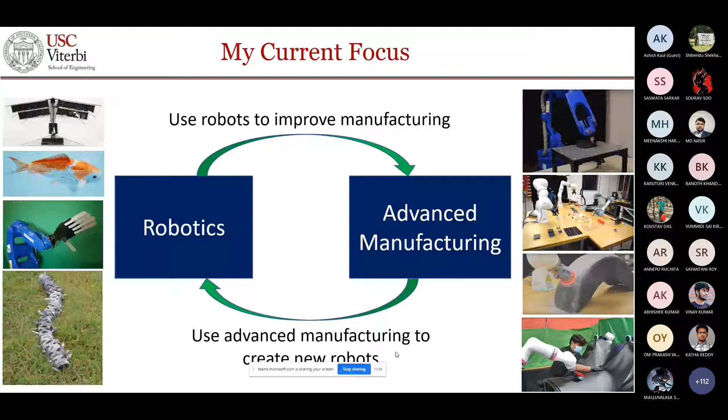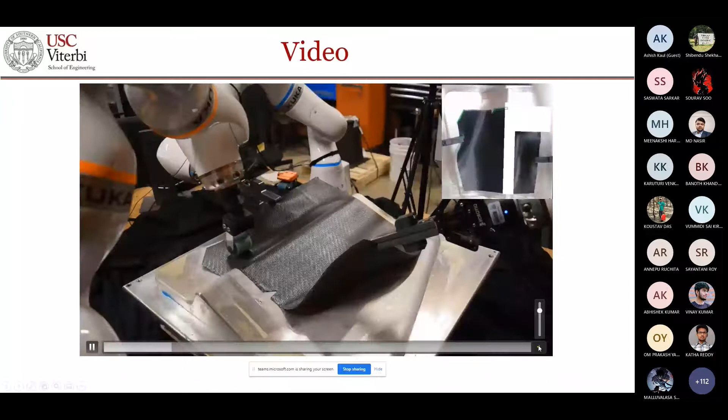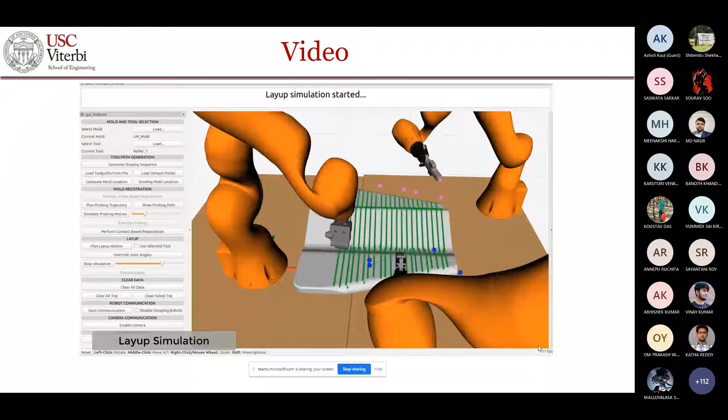I'll quickly show you some work on our composite processing. This work shows how we can use robots to process composites. The system uses advanced computer vision to detect defects and calls humans for assistance. Humans play an important role in robotic cell operations, providing the cell with high-level strategy to generate good quality plans. Our robotic cell can produce defect-free composite parts. We believe this work will accelerate the adoption of composite materials and lead to the realization of innovative robotics.

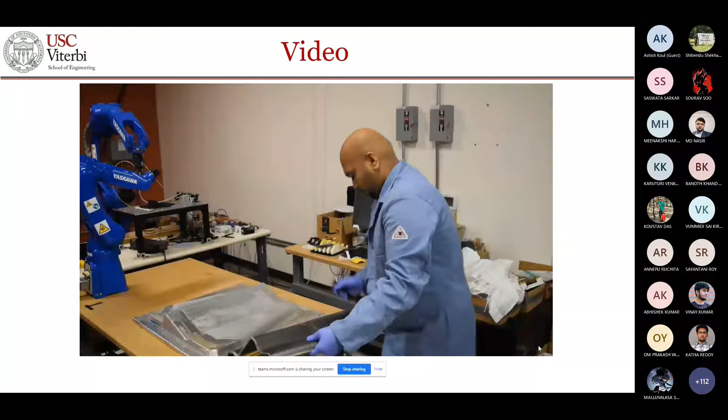I would also like to quickly show a video on our flapping wing micro air vehicle. Can someone confirm that you were able to see the previous video? Yes, sir. Okay, great.

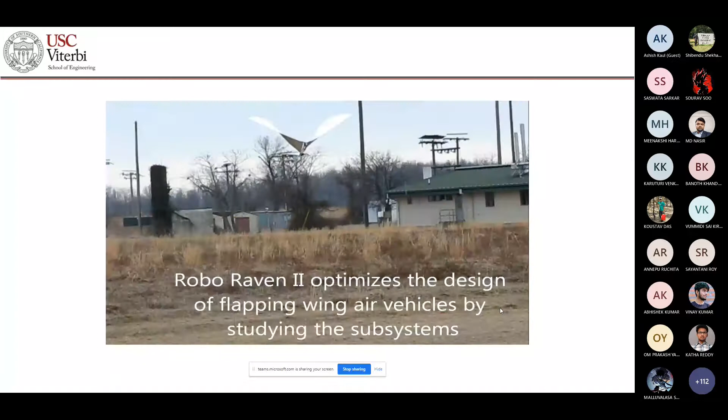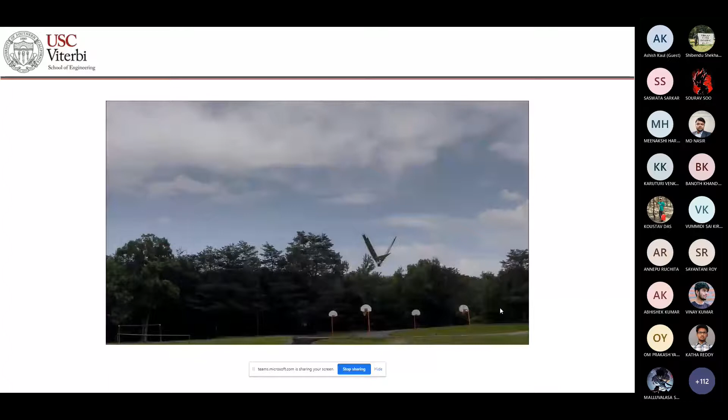We have been building this flapping wing air vehicle for a while. The idea is to create a flying platform that flies by flapping its wings. We have built many generations of this platform. In the third generation, we started integrating flexible solar cells into the wings, which we use to charge the battery, allowing the platform to fly using harvested solar energy. In the fourth generation platform, we added an autopilot, which allows it to loiter about a specified waypoint, or you can command it to go to a waypoint.

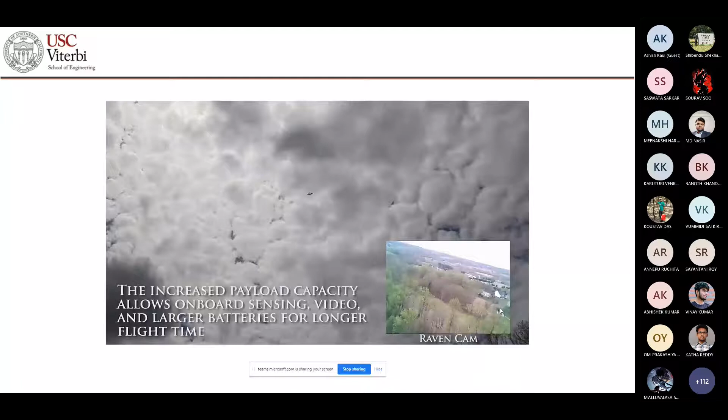In the fifth generation platform, we added thrust boosters at the back, using two small propellers to boost the thrust, allowing the vehicle to perform very aggressive aerobatics. Using this, it can dive and also climb very steeply. This platform flies with a camera, so you can see whatever the platform is seeing. That gives you an overview of different things happening in my research group.

Now coming back to the topic for today, we are interested in exploring additive manufacturing with robots. Before coming to that topic, let's review what we would like manufacturing to be able to do. We want manufacturing to offer features to deliver high performance, often meaning we need geometric complexity and material heterogeneity, so the manufacturing process should be able to provide it.

We want low cost so that products are affordable. We want low lead time, so when the order comes in, by the time the product goes out, the time should be as short as possible. We want to be able to get a high degree of personalization, so we can make custom things. And we want the environmental impact of the manufacturing process to be low. This is our wish list in terms of manufacturing.

Now, if we take a look at some common manufacturing processes, processes such as injection molding and die casting deliver low cost through custom tooling. For any part geometry you want to build, you will build a dedicated mold or a dedicated die for making the part, and this allows fast cycle time and low cost. But complexity is moderate, lead time is high because it takes time to build that mold or die, and this is a mass production process, so you cannot customize - you cannot make three different things and yet use the same tool.

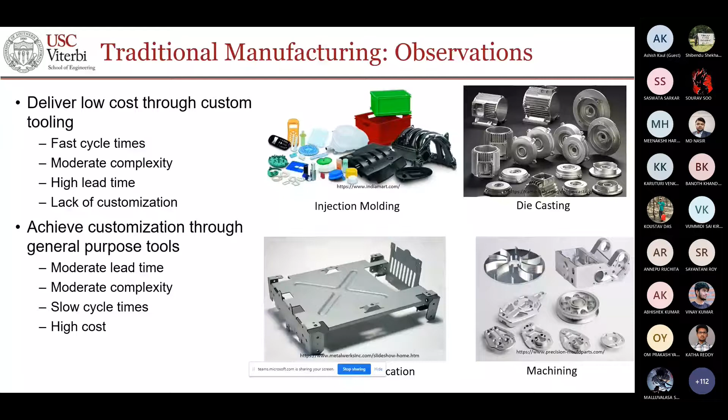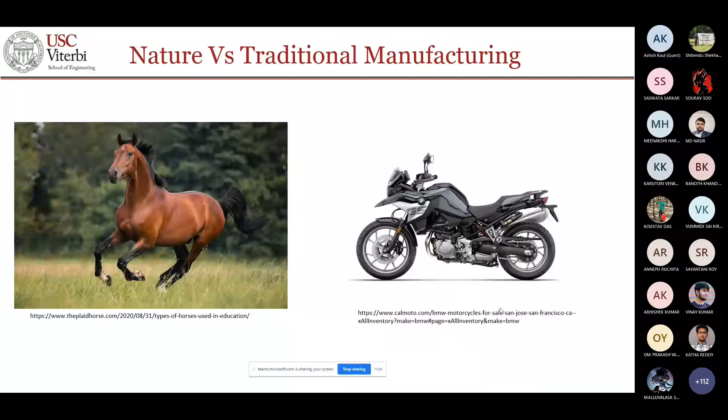So additive manufacturing is a process which we want to grow things in place. Now, in traditional additive manufacturing, there's no part-specific tooling. You can build incredibly complex geometry. The idea is that you're going to take the desired model, slice it into very thin slices, and build one slice at a time, adding one slice at a time, and that's how you build the entire part.

So if you think about additive manufacturing, it's basically stacking up 2.5-dimensional layers to build the part. It is using two-dimensional or 2.5-dimensional layers to build the part, so it's not really creating 3D layers. In nature, when things grow, we do create fully three-dimensional shapes there.

But additive manufacturing has many benefits. You can realize shapes that are not possible using traditional manufacturing. You can get enormous shape complexity because you're not going to pay a penalty for building the tool, or sequentially process feature by feature. So therefore, you can have really complex shapes. You can do customization without incurring any cost penalty, and you can eliminate post-fabrication assembly operations.

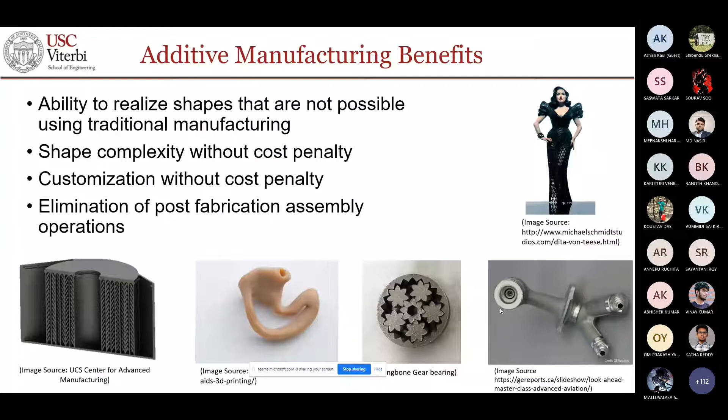But then there are challenges. Let's quickly review them. Since you're trying to build things layer by layer, and these layers are thin, it takes a long time to build a part. And often if you have an overhang structure, then you would print a lot of support structure which needs to be removed, and that's going to take a long time. So most additive manufacturing processes have long build times, particularly when you're trying to build large parts.

You are approximating the shape via 2D layers, and there is significant potential of delamination between layers. So for many different shapes, if you approximate the geometry by 2D layers, you get very poor mechanical properties. You apply a little bit of force and layers will just delaminate, and that creates a major problem.

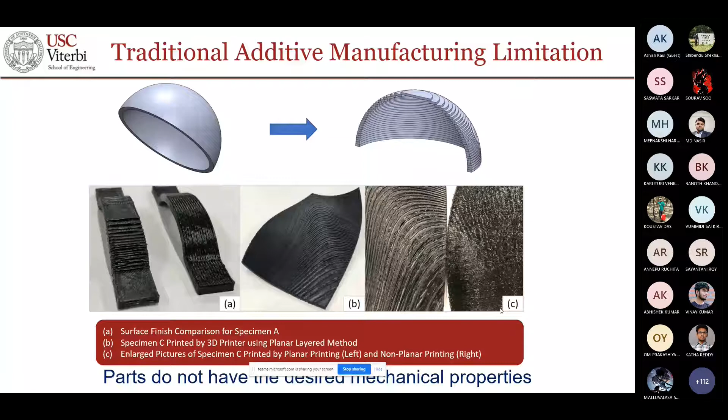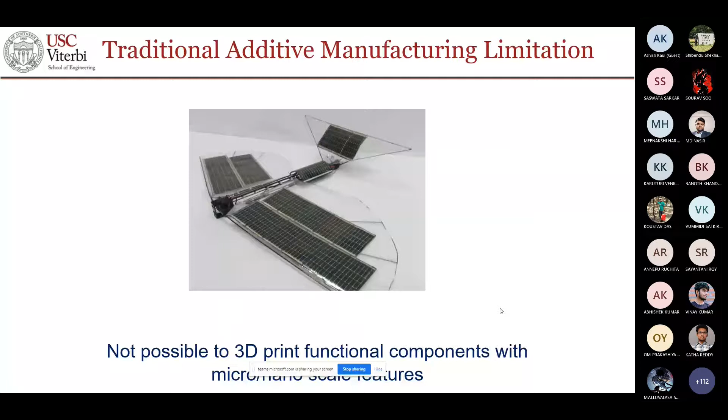The other limitation is that usually the machine will be about 10 times the size of the part that you're trying to print, particularly if you're dealing with metal machines. Now plastic machines are not that big, but in metals, machines tend to be very big, roughly 10 times the linear dimension of what you can print, because with metal you have a really complex system for managing the material and also delivering energy into the material.

Some people say that some of the earliest examples of additive manufacturing are pyramids, which were built layer by layer by humans. So you see, people were able to build things which are 100 times their size scale.

Current additive manufacturing requires huge machines to build large parts, and we would like to change that. So these are some of the limitations of additive manufacturing. Now the question is,

how can we overcome these? Our vision has been that we want to be able to use robots, particularly multiple collaborating robots which can then build large parts. And we want to really use three-dimensional layers, so we want to make 3D printing truly 3D in nature.

We want to do 3D printing with 3D layers, not with planar layers. We want to build really large parts, and we want to explore new sensing technology for in-situ monitoring and control, so that if there's any defect forming in the additive manufactured part, we can fix it on the spot. The cell can do material deposition, place prefabricated components, and also do post-processing. That's our vision, and that's why we believe using robots is truly exciting in this field.

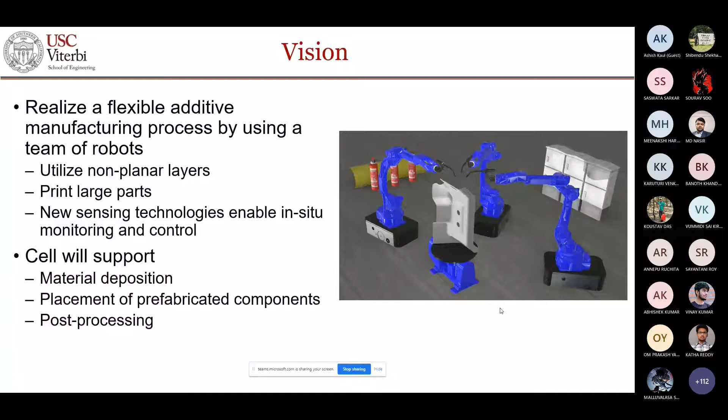Our research has three different layers. The first, bottommost layer is additive manufacturing, where we are interested in developing technology which can do additive manufacturing with non-planar layers.

All our execution happens with robots, so we do a lot of advancements in robotics. And since we are using complex three-dimensional layers, created using multiple different interacting robots, we need advanced artificial intelligence to pull this off.

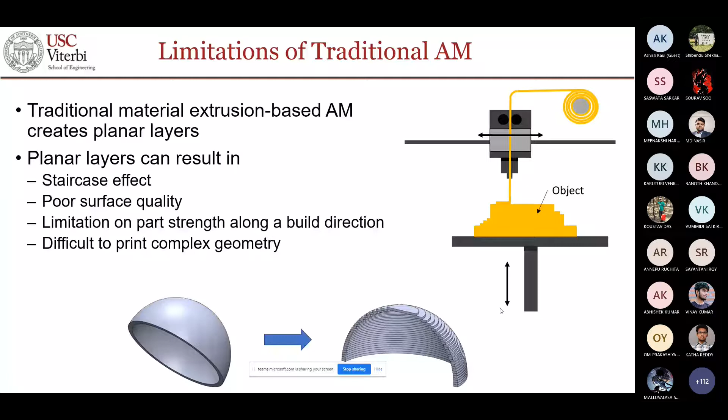Let's begin with the very basic technology: printing with conformal layers. The first idea is that rather than stacking 2D layers as done by traditional additive manufacturing, which creates huge delamination problems, we want to be able to use truly three-dimensional layers. If we can use truly three-dimensional layers, mechanical properties are significantly improved, and we also get better surface finish.

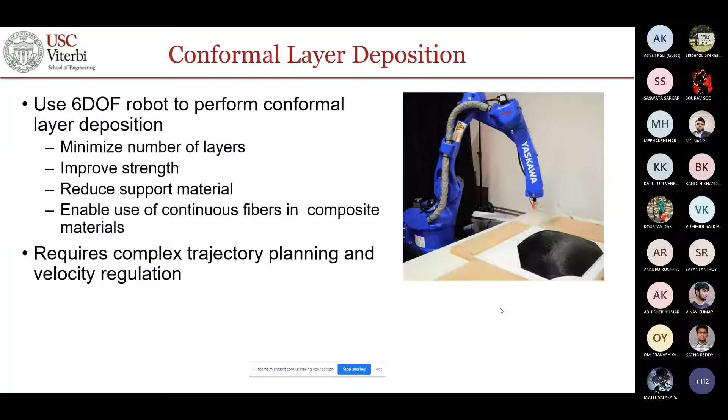We want to do this conformal deposition using a 6 degree of freedom robot, and this requires us to solve complex trajectory planning and velocity regulation problems. We've done this and created an interesting array of geometries where we've demonstrated that printing time with non-planar layers is comparable to printing time with planar layers. However, mechanical properties are significantly better, and in some cases surface finish is better too.

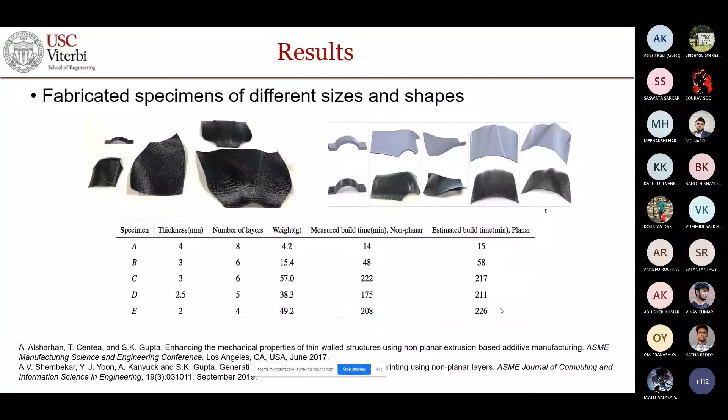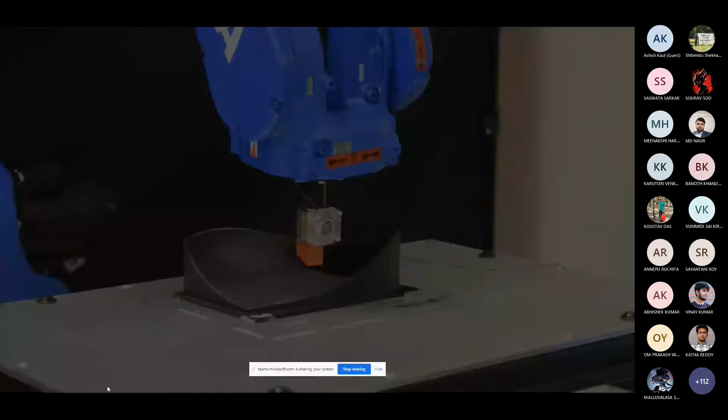This video will quickly illustrate that process, how it works. In this case, we are using a prefabricated substrate and performing printing on it. Later in the talk you will see a multi-extrusion system where we can fabricate the substrate with the same robot, but the first experiment I'm showing you uses a prefabricated substrate. This type of technology is especially useful when printing with composite material, which lets you create really good quality parts.

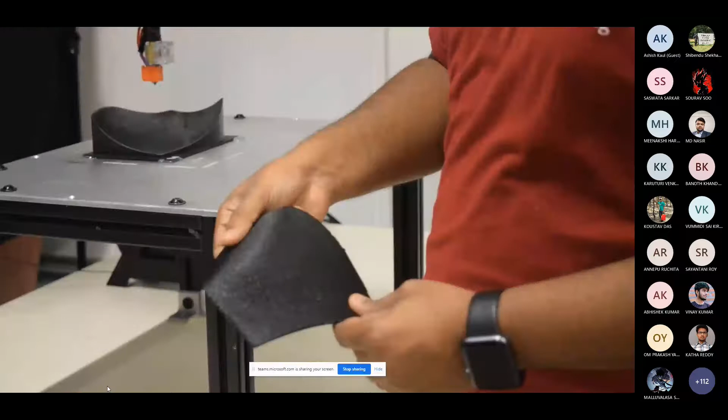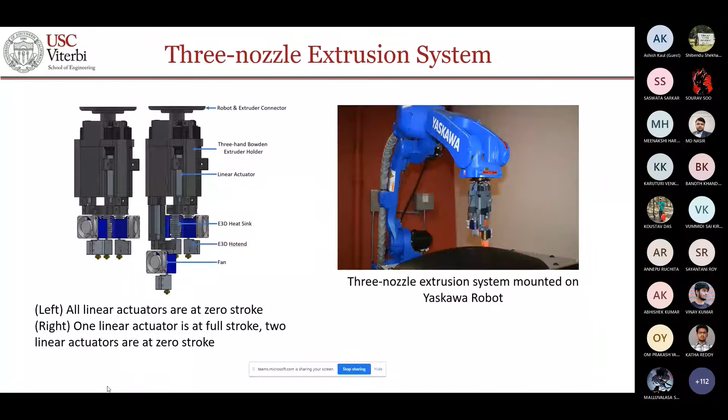Once you're able to do conformal printing, we can build a setup with multiple different extrusion nozzles, and we've built that setup with 3 extrusion nozzles. So we can do 3-color printing, or print support material with one nozzle and print with the others. We can do quite interesting things in this case, with a setup that does printing with 3 different nozzles.

Once you have the capability to do conformal printing with multiple different nozzles, an interesting possibility opens up: multi-resolution printing. Fixed resolution printing means you select one nozzle. If you select a large diameter nozzle, you can print fast but get bad surface finish. If you use a small diameter nozzle, you print slowly but get good surface finish.

But if you have a multiple nozzle setup, then you could potentially print the interior of the part with a large diameter nozzle, print it fast, and print exterior shapes with a fine diameter nozzle. That requires you to use conformal printing, because the outside of the object is likely to have complex contoured shapes.

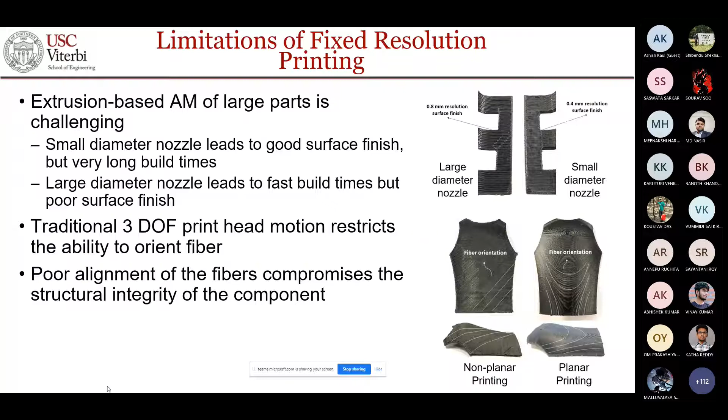So we have done that. Our first setup used 2 robots, 2 collaborating robots, and using that we showed that we can build parts much faster than with the smaller diameter nozzle. The surface finish was as good as the smaller nozzle, part built as fast as the larger diameter nozzle, with surface finish as good as the smaller diameter nozzle. So we were able to find the right balance between the two.

At the bottom of each slide, I have included the papers which provide more detail. This work was published in IEEE International Conference on Robotics and Automation.

After that, we built a single robot setup where one robot with 2 extrusion nozzles is able to accomplish the same result, because we don't want to tie up 2 robots doing this printing. We demonstrated that using a single robot setup, we can achieve similar results. This paper is going to be appearing early next year in ASME Journal of Computing and Information Science.

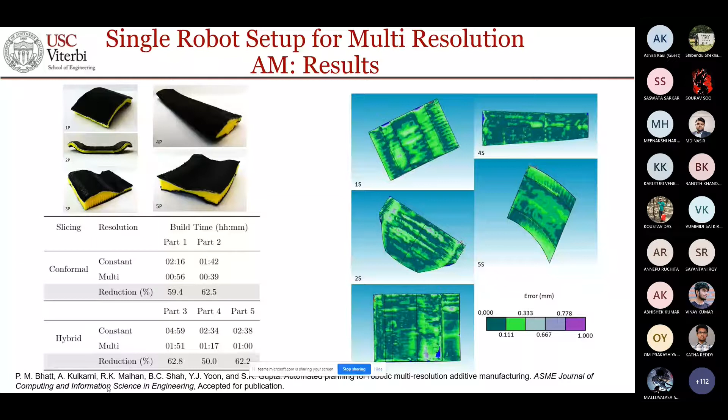As I mentioned before, a lot of additive processes require use of support structure, which slows down the process quite a bit. You have to remove the support structure, which wastes material. It might also lead to poor surface finish, and overall it increases the time. So whenever possible, we want to avoid support structure.

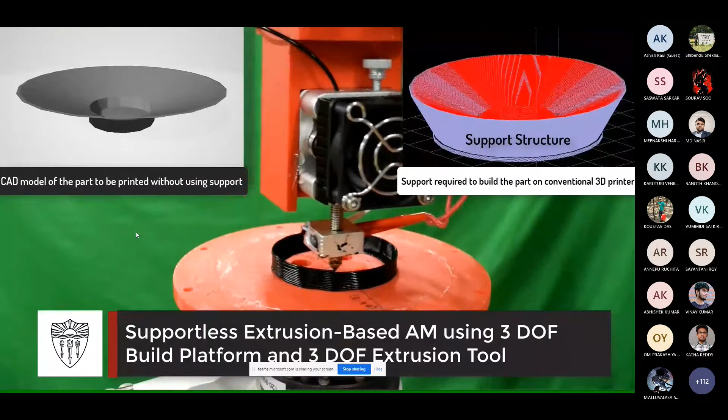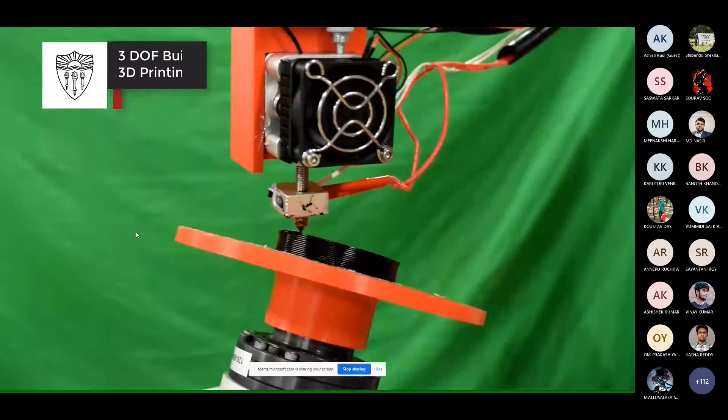So we built a setup where we use 2 collaborating robots. The bottom robot holds the build platform, and the top robot does the deposition. When we start printing parts which lead to overhang, we start tilting the base platform, and therefore we can compensate for gravity, and we don't require use of support structure. So this type of technology gets rid of support structure.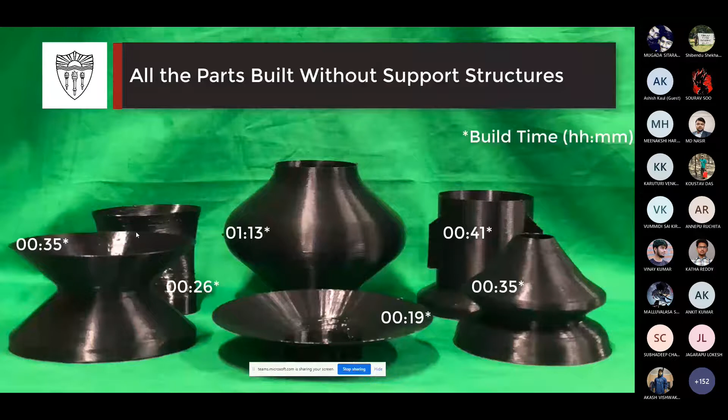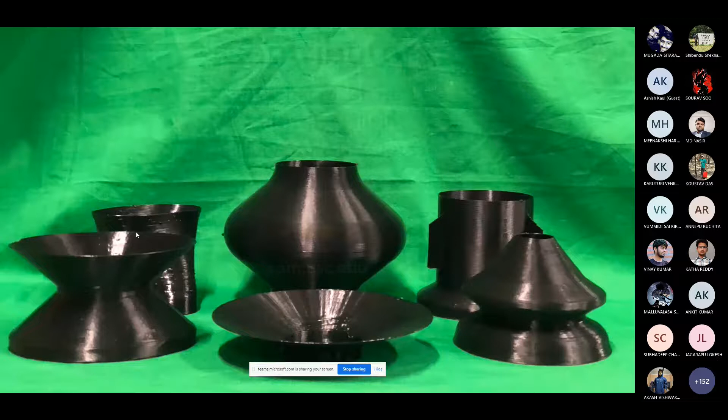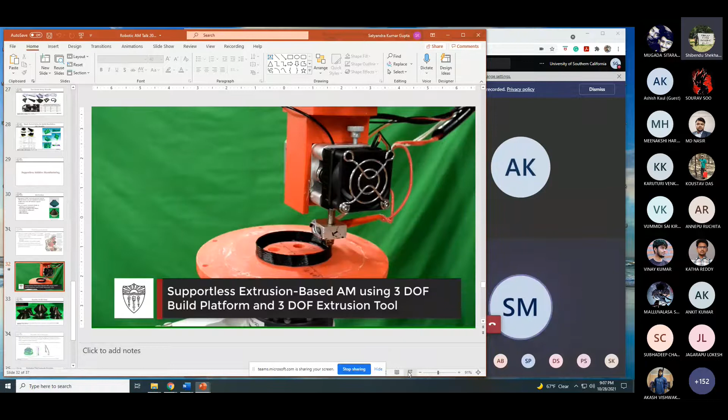Hello, Professor Gupta. Hello. Professor Gupta, you are in muted condition, please unmute yourself. Okay, can you hear me okay now? Now it is okay, sir. Yeah, I don't know, I was not even touching the screen, so I'm not quite sure how I muted myself. So where did you lose me? Hello? So it's okay now, sir. Okay, alright, so I'll just continue.

So we can dramatically reduce printing time, as you can see. For this large part, with support structure, it would have taken 11 hours 42 minutes to print. We can print it in 1 hour and 13 minutes. This work was published in Additive Manufacturing Journal in March 2020.

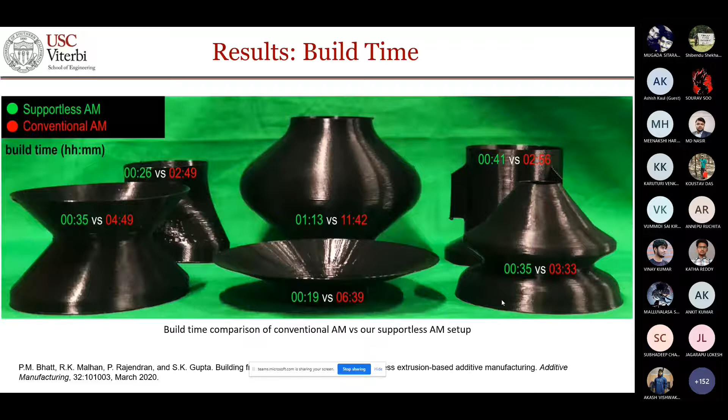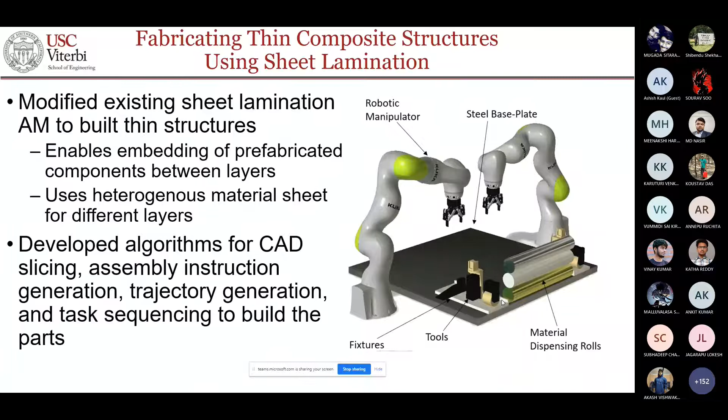Another interesting thing we have done is that rather than doing extrusion-based printing, which is a point-based process, we also built a process where we can stack sheets, cut sheets, shape them and stack them. That allows us to additively manufacture a whole variety of interesting things, including wings of flapping wing air vehicles, as well as a wide variety of other interesting structures. This paper was published in Additive Manufacturing Journal in 2019.

Another interesting thing we have demonstrated is that during printing, using two collaborating robots, you can embed externally fabricated components. In this case, we have demonstrated that you can integrate assembly and additive manufacturing. We are able to generate plans for picking up components and inserting them. Once a component has been placed, we can print around it. That allows us to create a wide variety of interesting products where we can embed externally fabricated components.

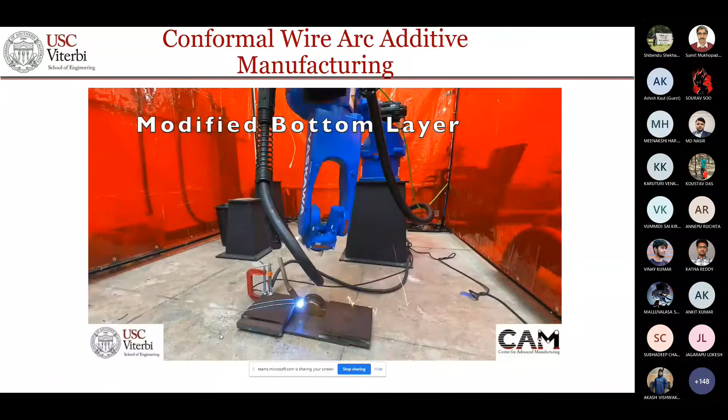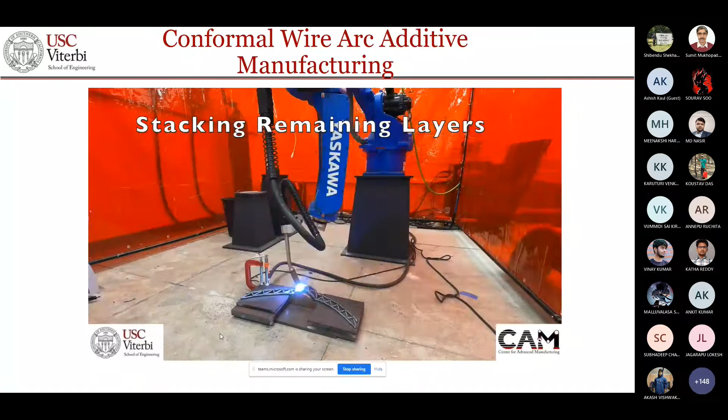So our recent work has been conformal wire arc additive manufacturing. Here we are using robots to do conformal printing using the WAAM process. So we can print interesting shapes using this process.

We have demonstrated that we can actually get reasonably good material properties. So we can do interesting shapes and we can get reasonably good material properties.

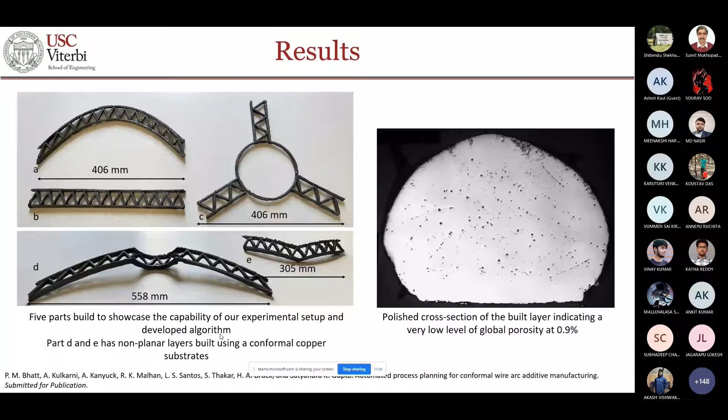So to quickly summarize, robot-based conformal printing can improve mechanical properties by being able to print out of plane. You can tilt the part when you're printing it, and then you can reduce the build time due to support-less deposition, and also you can do multi-resolution printing. Once you can do conformal printing, then you can also do multi-resolution printing.

We can insert prefabricated components during the assembly process, during the 3D printing process, and therefore integrate assembly and additive manufacturing. We enable many more material choices in multi-material printing by mixing the material being printed using either a two-robot system or a multi-nozzle system. We offer lots of interesting choices.

So all these benefits basically illustrate that the idea of doing additive manufacturing with robots is a promising idea, and it holds a lot of promise in terms of eliminating many of the known limitations of the current additive manufacturing process. So then the question comes in: what are the deep research issues? What are some of the fundamental problems that need to be solved?

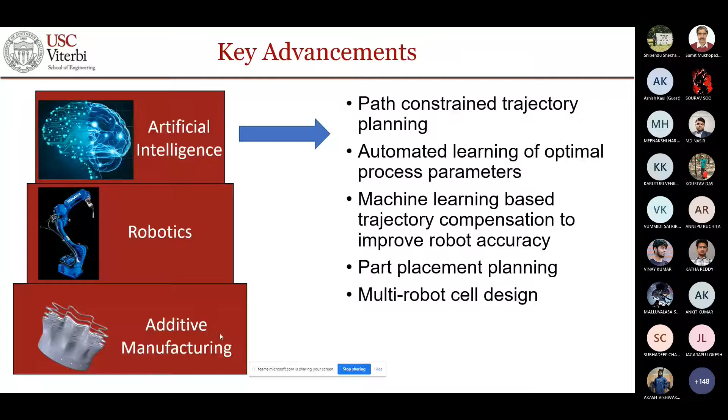The reason why this problem is so hard is that robots are highly coupled systems. Even if you're drawing a line along the x-axis defined in the robot base, all 6 joints have to be moving in a coordinated way in order for you to do that, if you are trying to maintain a certain orientation. So robots are highly coupled systems - there's no just using a single motor to get something done.

Robot performance is also highly non-uniform over the workspace. You can get very good accuracy at certain places, certain other places you will not. The workspace may have singularities - all kinds of challenges because of this non-uniform performance. Robots are also highly nonlinear systems, and this high degree of nonlinearity makes many of these problems quite challenging. As we start integrating external sensing and coordinated motion between multiple different robots, these become really, really complex systems. So all this makes these computational problems very challenging.

The first problem that we want to study is path constraint trajectories. The idea is that you know how your tool tip needs to move in order to create the geometry, and you know how the part should be tilted. So that path constraint is given to you. Now you have to figure out how the robot should move, how robot joints should move, so that the tool moves with respect to the intended object the way you wanted it to move. There are constraints for the path.

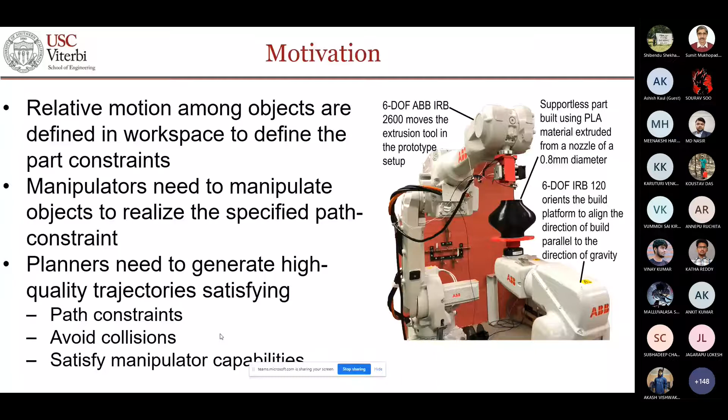You want to avoid collisions between the tool and the already fabricated part. You have manipulator joint limits, you have manipulator singularity - those are all kinds of manipulator constraints that you have to also meet. So you can pose this problem as trying to find a joint space trajectory for the robot where you meet all the constraints, and you can have an optimization function which could be minimization of time, or minimization of some other performance variable like the effort the robot is taking to get this done.

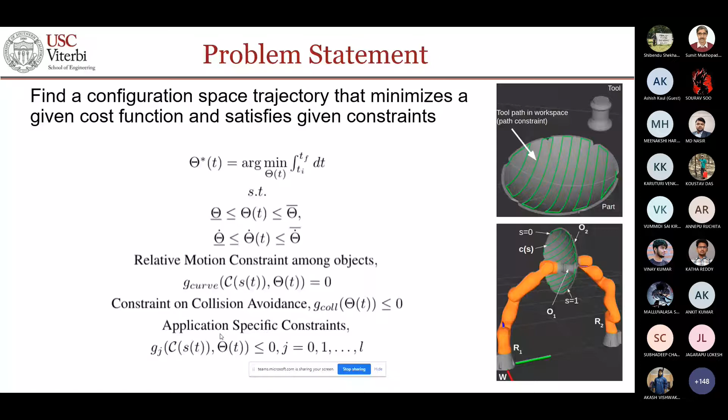Now you can pose this as a nonlinear optimization problem. However, existing nonlinear optimization approaches will not be able to solve it because your constraints are highly conflicting. Once you start using nonlinear optimization, you'll get stuck in local minima, and those local minima basically would not even be a feasible solution.

So our idea in this space has been to use an adaptive representation of configuration variables. We will keep adding more variables or providing finer resolution where a lot of changes have to happen, and we use relatively simple representation where things are not going to change that much. Then we want to use a successive refinement strategy for solving this problem, because giving the problem all the constraints in one go simply will make this problem impossible to solve.

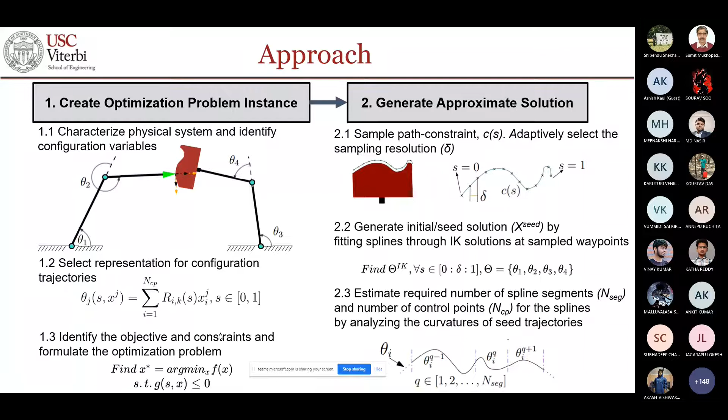So the way we work is that we create an optimization problem instance, we create initially some approximate solution. Using that, we learn where we need more resolution - we're solving this problem with splines, so we're basically asking where you need more control points and where you can get away with fewer control points. And then we want to apply constraints successively.

We don't want to be throwing all constraints at once, because unfortunately the problem is not going to be solved that way. So in this case, we want to start with some basic constraints, then add a few more, then add a few more. That's the successive refinement idea, and we have demonstrated...

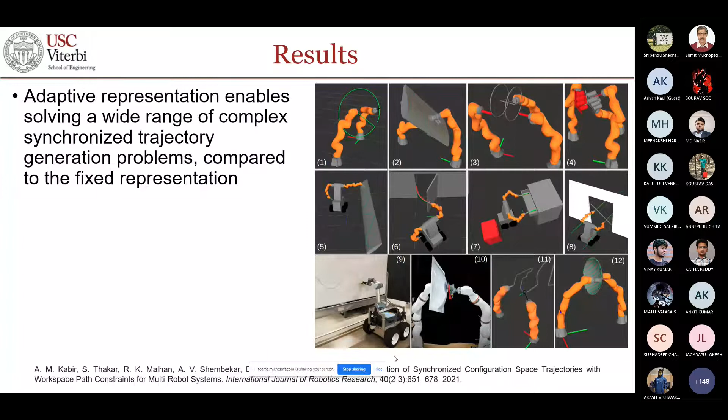So we have demonstrated that we can solve really complex path constrained trajectory planning problems with this idea about adaptive representation and successive refinement. This work was published earlier this year in International Journal of Robotics Research, so you can get more detail from that paper.

The other interesting thing that needs to happen is you need to learn process parameters. For example, when you're doing the WAAM process, there are a number of parameters you need to learn: tool velocity, tool inclination, tool distance, feed speed. Now, one thing we know is there are challenges when making sharp angles - you start creating bulge. So can we learn this so the robot can regulate its speed?

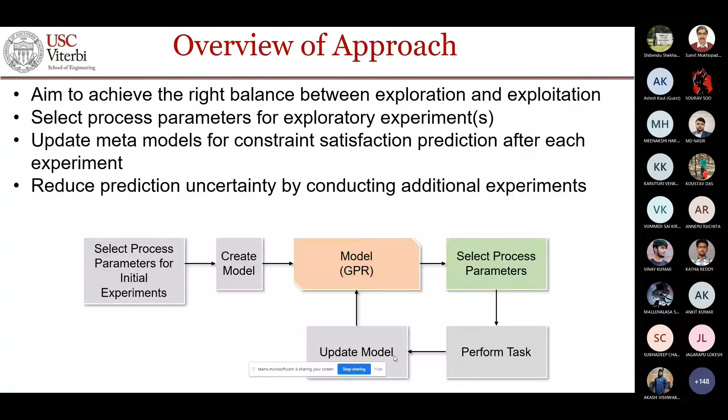The approach for learning this is inspired by active learning. The idea is that you do some initial experiment, fit a surrogate model, and start selecting process parameters which try to find the right balance between exploration and exploitation. Then you perform the task and update the model, and hopefully your performance improves in few trials.

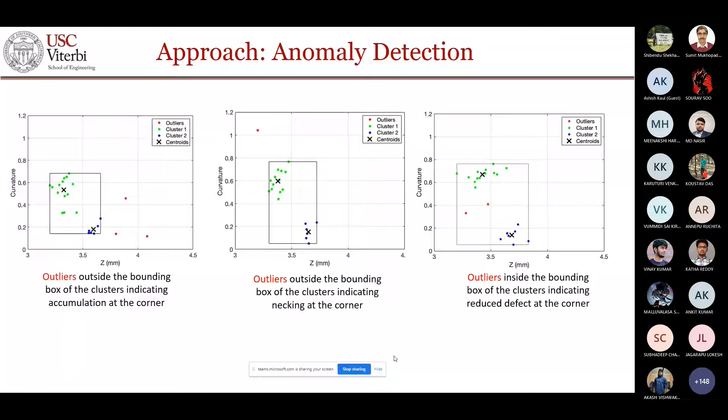So in this case, we begin with a fixed velocity scheme, then do some experiments where we try regulating velocity around the corner. We scan the part, build the model, and reduce the dimension of those observations in terms of curvature and heights. Then we run anomaly detection approaches to determine which particular runs show anomalies, and using that we try to figure out how the velocity should be regulated. Then we can learn that, and using velocity regulation, we're able to demonstrate improvement.

And this work appeared a couple of months ago in the ASME Computers and Information in Engineering.

So if you have a large robot and you're trying to print a part with it, different regions of the workspace will give you different accuracy. Accuracy changes quite a bit depending on the region of the workspace - some regions give very good accuracy, some regions give very bad accuracy. That's a known thing, because of the way joint angle mapping happens to accuracy - accuracy over the workspace is highly non-uniform.

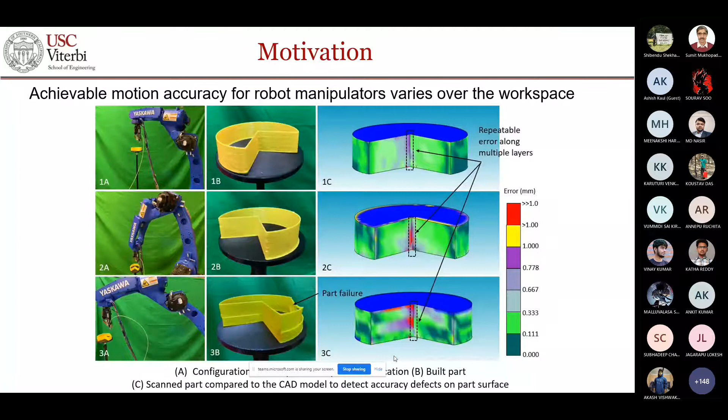So we are interested in solving the problem: when we're trying to print a small part, where should we place it in the robot workspace so that we get the best print quality?

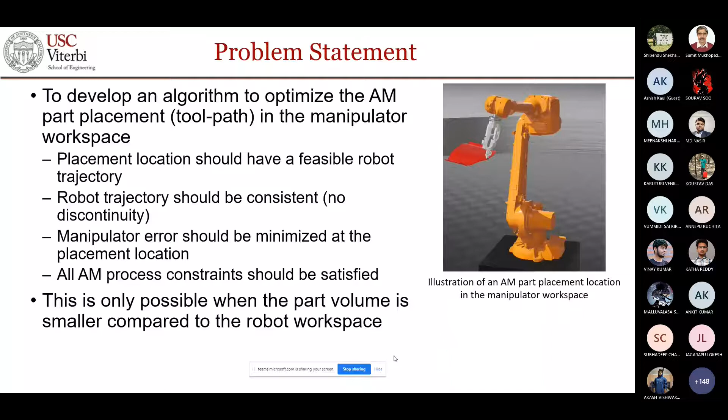So we begin with modeling what the effect of the joint error is. We catalog and model different kinds of joint errors as a function of the configuration of the robot. Then using that, we look at part placement optimization, where we try to see what kind of trajectories will be needed and how we can place the part so that we meet the reachability, collision, build direction, and path consistency constraints, while maximizing the achievable accuracy.

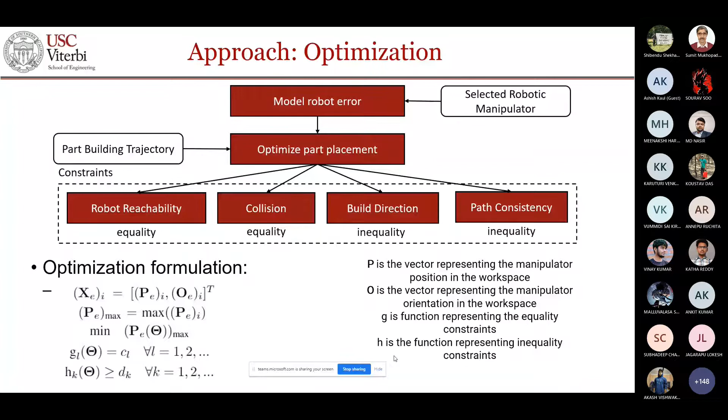Using that type of formulation, we have demonstrated that you can actually find locations where you get really good accuracy and a much better print. This work was published earlier this year in IEEE International Conference on Robotics and Automation.

And we have demonstrated that if you're printing certain kinds of geometries, there are ideal locations for printing them, compared to wherever a human might have initially placed them, and what kind of improvement in accuracy can be achieved.

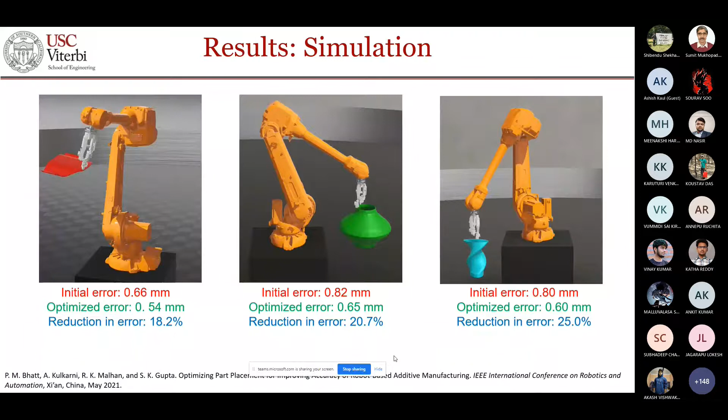Now, articulated robots have high degree of repeatability but poor accuracy - accuracy can be 10 to 20 times worse compared to repeatability. For example, repeatability could be 20 microns while accuracy could be 400 microns. The reason is that when a robot arrives from the factory and has been calibrated there, its parameters might have drifted, or the factory calibration might not have been very accurate, or they might have made certain simplifying assumptions. All this causes challenges, so when you start doing printing with robots, you will not get very good quality results.

Now, if you want to do additive manufacturing with robots, you have to address this accuracy problem, because without that, you're not going to get good quality printing.

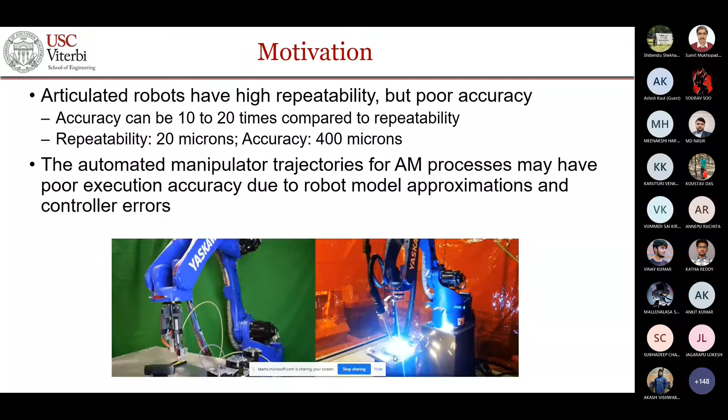So the idea in this case is that can we build a compensation scheme so that when we are performing printing, we will compensate the trajectory so that its execution performance improves. And you will apply this on top of the existing robot controller. So the idea is that you have an input trajectory, you can sample it, take a very small sample of it, execute it in the robot, see what kind of error you're getting. Then, based upon that error, you can train a neural network which can apply compensation. And then this neural network can be applied on the entire trajectory, and you can go ahead and do the printing.

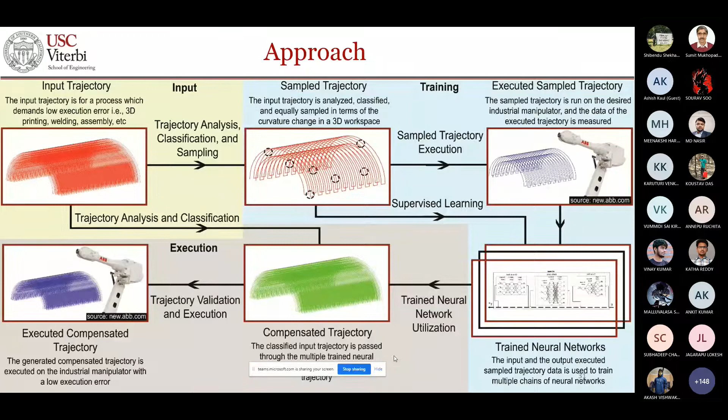So we have solved two different versions of this problem. The first version we solved was where we built a compensation scheme in the workspace. In this case, we are interested in knowing which regions of the workspace we were printing, and what were the locations and angles. So we compensated in angle space, position space, and time space, because robots are often a little bit sluggish since they're overdamped. So we compensate in all three dimensions. Using this, we demonstrated that just using 4 to 8% of sampling by training a neural network, we can produce really good results, reducing the error significantly.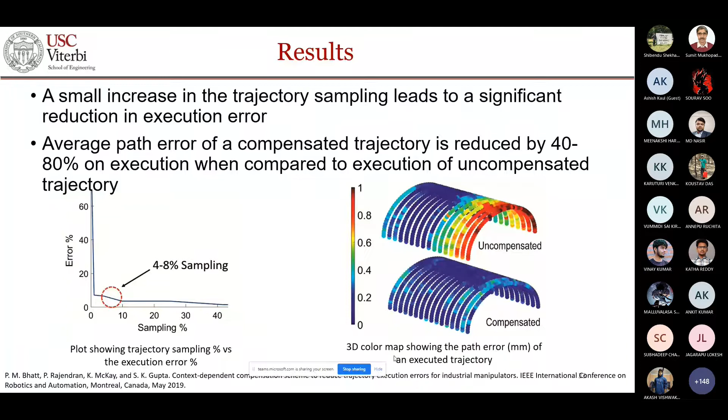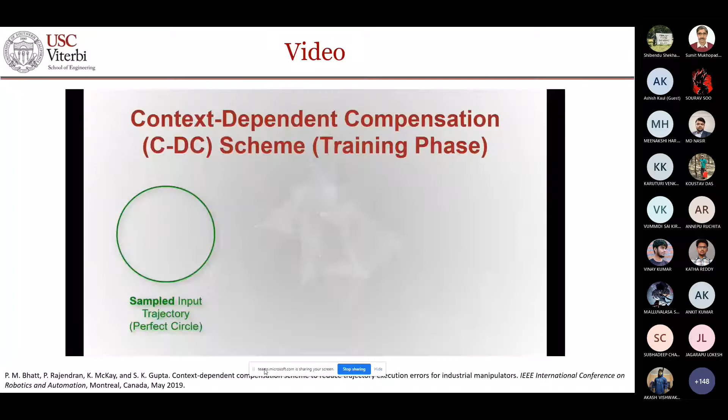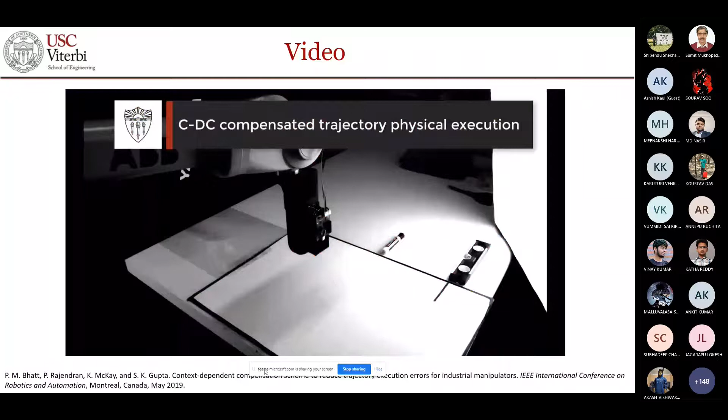We demonstrated this by trying to draw a circle on a moving platform. We begin by drawing a reference trajectory, which is not a circle, but the idea was that on a moving platform, this will turn into a circle. When we ran the uncompensated trajectory, it did not work out. But when we compensated the trajectory, we got very good results. This video illustrates that. This is uncompensated, where you are unable to get good results. And this is now a compensated trajectory where we are able to create a good circle on a moving platform. So the platform is moving, and the robot is stationary.

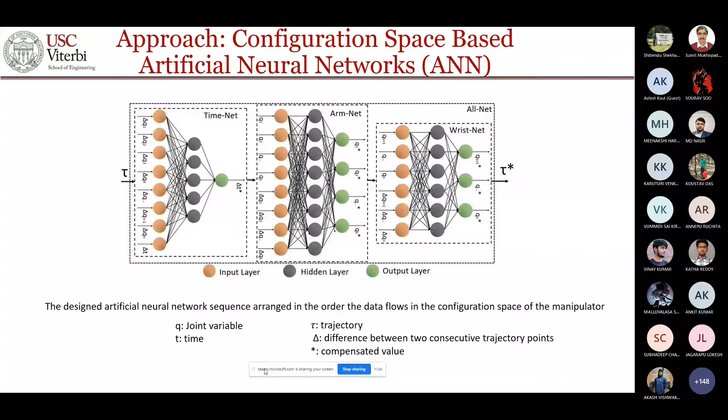We have also solved the same problem using a configuration space neural network. In this case, rather than performing compensation in the workspace of the robot, we are directly working in the joint space, solving the problem there. In our MSEC paper this year, which also received second place best paper award at the conference, we demonstrated that using configuration space compensated trajectory, we are able to achieve very good performance. Again, using a small fraction of the trajectory for training, we are able to execute it really, really well.

So far I have discussed how we can generate trajectories, how we can identify process parameters for doing printing, how we can find the right place to place the artifact in the robot workspace, and how we can compensate the trajectory. But some problems will require multiple robots to print concurrently.

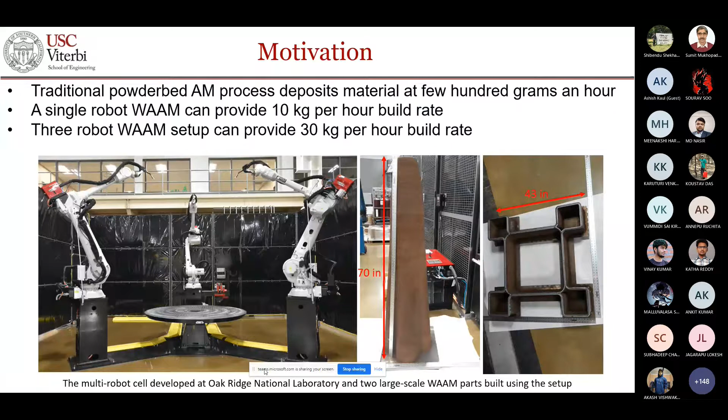So in our recent work, we have been looking into a 3-robot cell for printing large metal parts. The motivation behind this work is that traditional powder bed AM processes deposit material at a few hundred grams an hour. A single robot WAAM can do 10 kilograms per hour, but with 3 robot WAAM, you can do 30 kilograms per hour. So to build big parts, we need multiple collaborating robots performing printing.

Now the problem is that if we have n manipulators, we want to place the robots such that the work is distributed equally among them. No robot is idle, and the part or section of the part which a robot needs to print is within the reach of that robot. And we minimize the inverse kinematic inconsistencies in the robot path. I'll explain that idea in a few minutes.

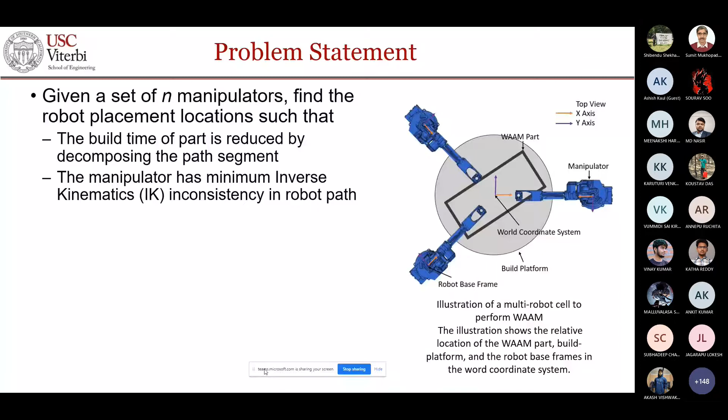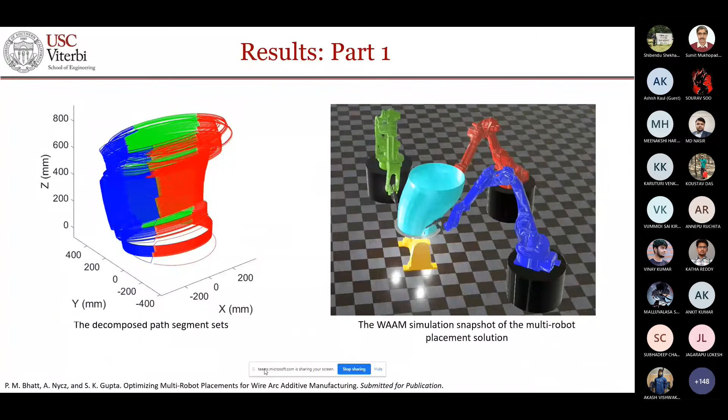So we begin by decomposing the part. We search for planes which partition the part such that we can have equal distribution of the work among the robots. Then we start searching for robot placement so that each robot can perform the task assigned to it. Here is a complex geometry which is being printed, where we found the ideal distribution of robots to print it. Now, in industry, people have talked about just building a cell where each robot is distributed 120 degrees apart angle-wise. We have demonstrated that if you use that cell configuration, you would struggle with this part, and your IK inconsistencies would be quite high.

On the other hand, if you optimize the placement of the robot, you can reduce the IK inconsistency.

Now, anytime you have IK inconsistency, there's a potential that you will cause a defect in the part. So that's why you want to minimize that.

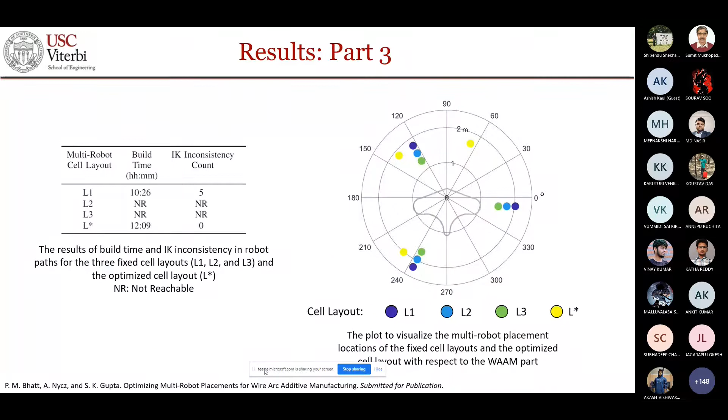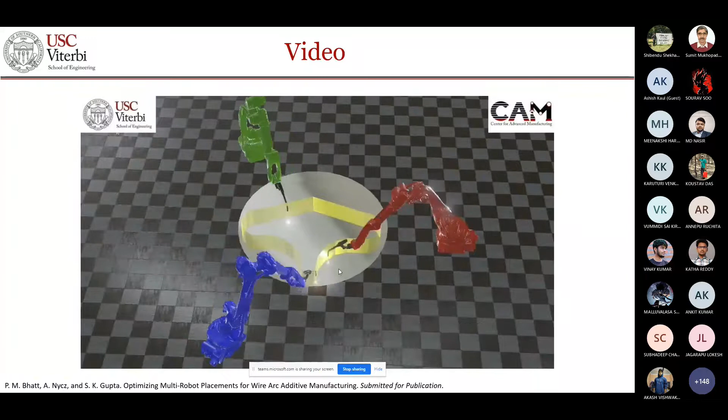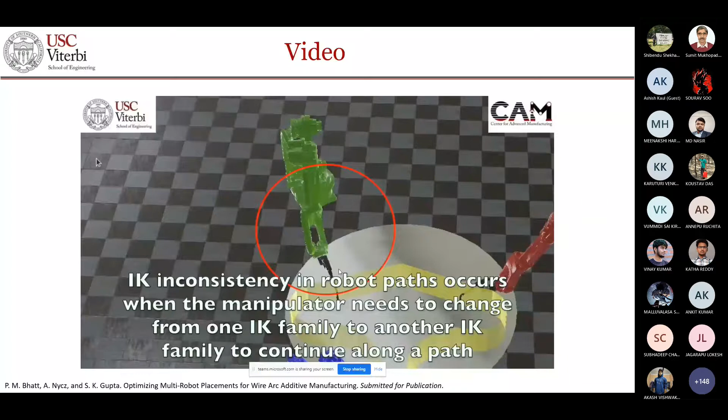Here's a video that will illustrate actually IK inconsistency as well. So this is showing basically where at a point the robot hits its joint limits and it has to find a solution from a different IK family in order for it to proceed. And that means the arc had to be shut and start again. So every time that happens, then there's a potential for creating a defect.

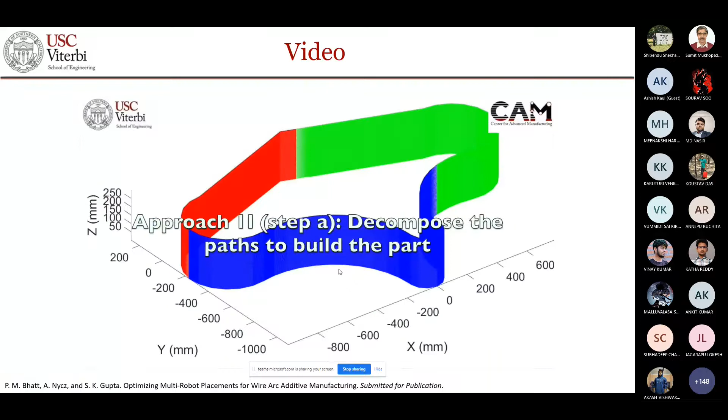So this is just showing now when you optimize robot placement and divide the work in a balanced way, then you can get significantly better solutions.

Okay, so let me conclude my presentation.

Building additive manufacturing cell using robots removes constraints associated with traditional 3D printing. You can do conformal layers. You can do multi-material fabrication. You can do supportless fabrication. You can insert prefabricated components during additive manufacturing. And you can start integrating inspection, prognostics, and health management tools into your robotic cell, which will then ensure that you are creating defect-free parts.